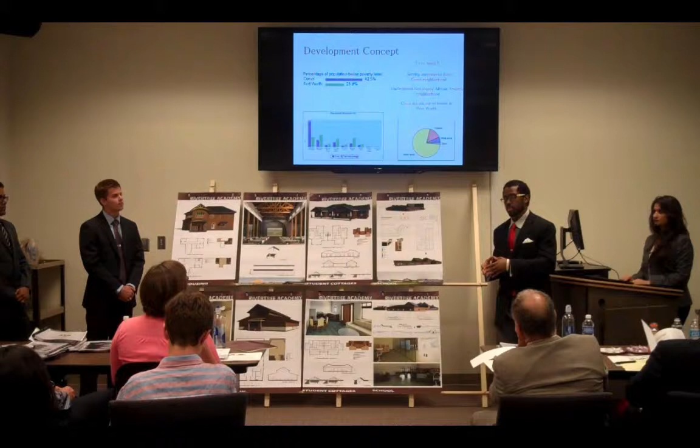As we've heard many times today, the Como neighborhood is an impoverished, underprivileged and underserved neighborhood. Many of the education rates are lower here, and a lot of students succumb to negative influences around them. We believe the Riverside Academy can be a safe haven for those students to get out of those negative externalities. Riverside will help them by refining their character through embracing God and embracing His natural creations.

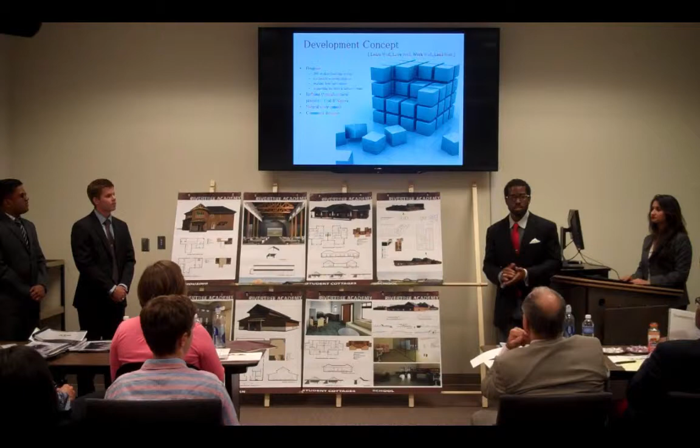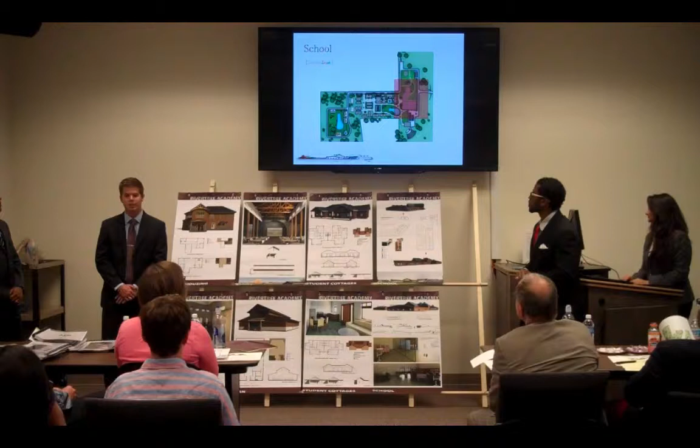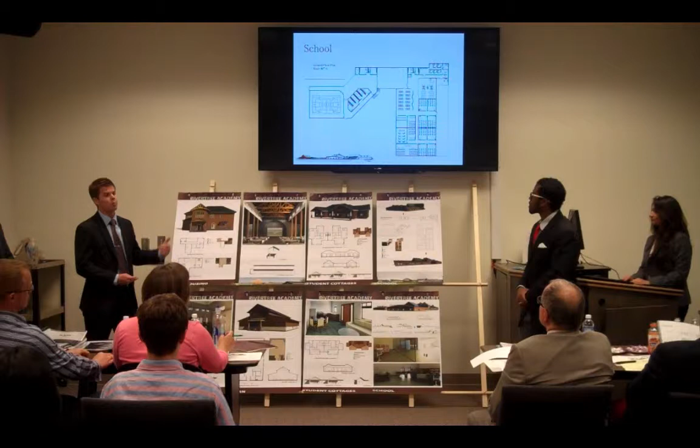Here is our overall site for this project. The next slide zooms in closer to the area we've decided to develop. What you see highlighted here is the school facility. It's two separate facilities. The one on the right includes classrooms, administration, counseling, library, and a cafeteria, built in Phase 1. The unit on the left is the recreational center, which would come in Phase 2, including a gymnasium and a couple locker rooms. This would be the unit the school would develop for future purposes.

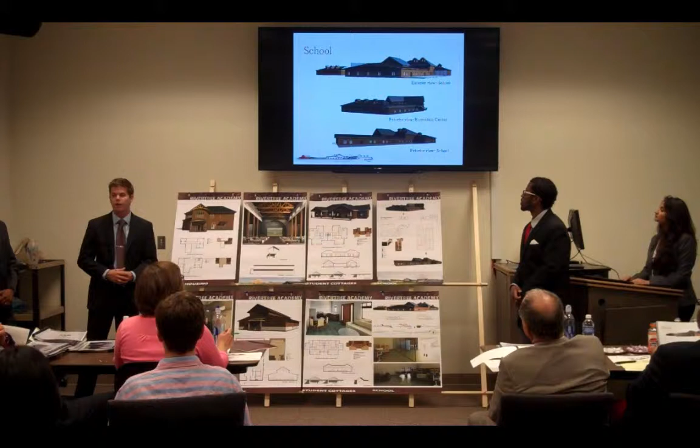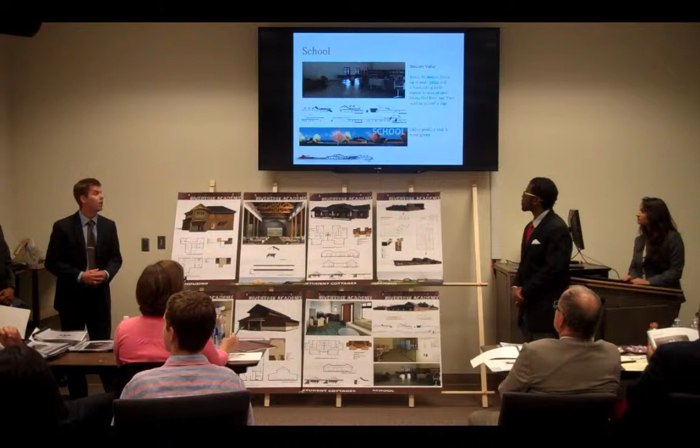The top image is upon completion of both units of the school. Below that is the recreational center with an outdoor deck, and below that is the exterior view of the classroom unit. At the top is a view from the interior library looking out upon the main hall and the cafeteria beyond. The top image is of the library, and the bottom image is what you see as you enter the site, the two units of the school.

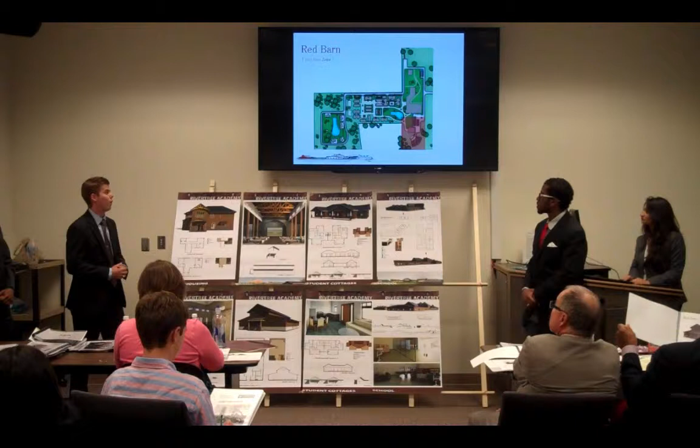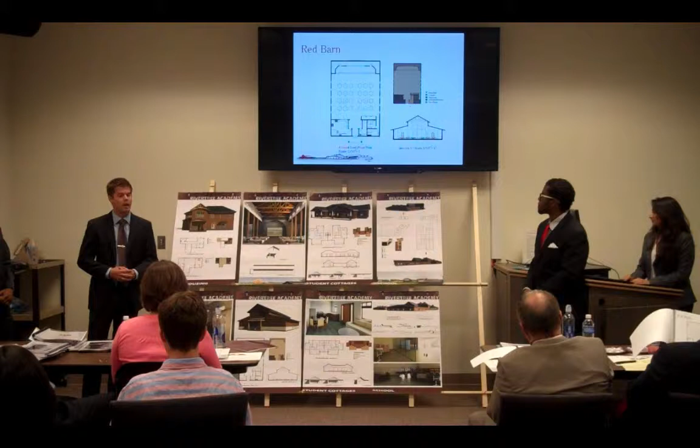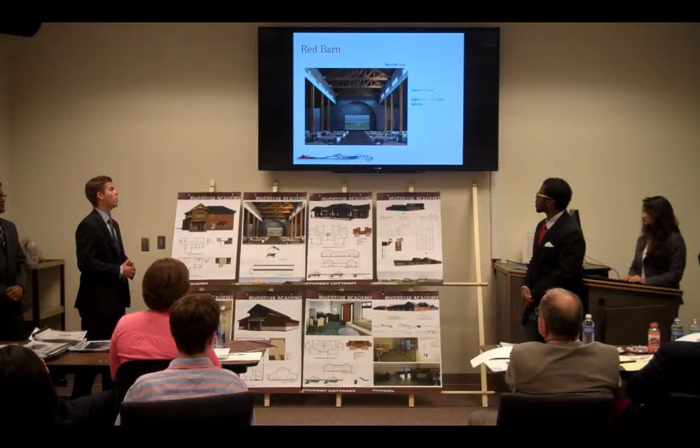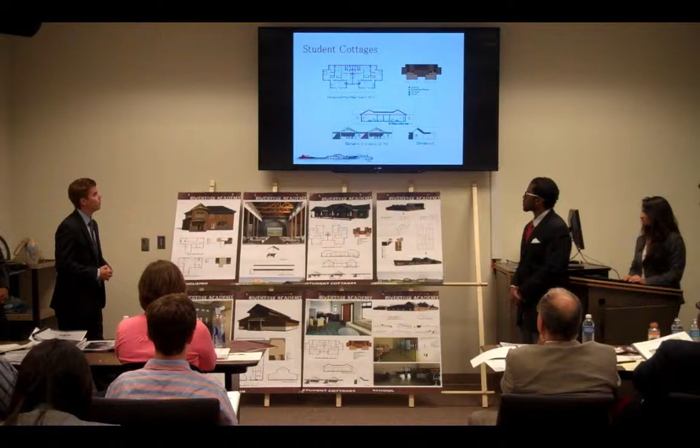This is the community we've created with our student cottage arrangement. This is an exterior view of a cottage and an interior view of a living room and kitchenette space. We've decided to go with two different student cottage types. One is a larger style incorporating 16 students and two supervising couples, a duplex style while still giving the feeling of a cottage. This is the smaller of the two units, intended for older students who need more privacy, including 8 students and 2 supervising couples.

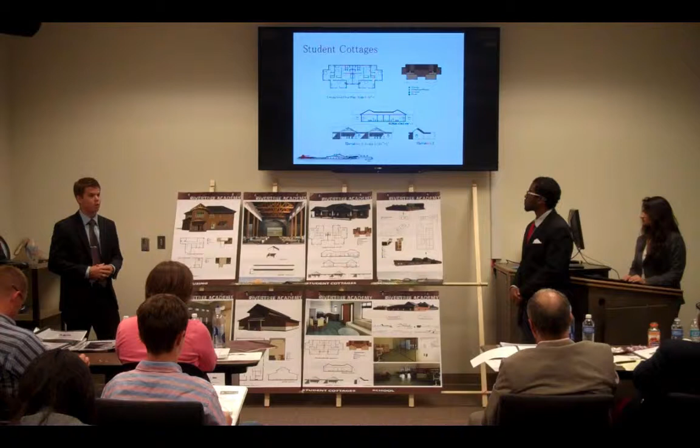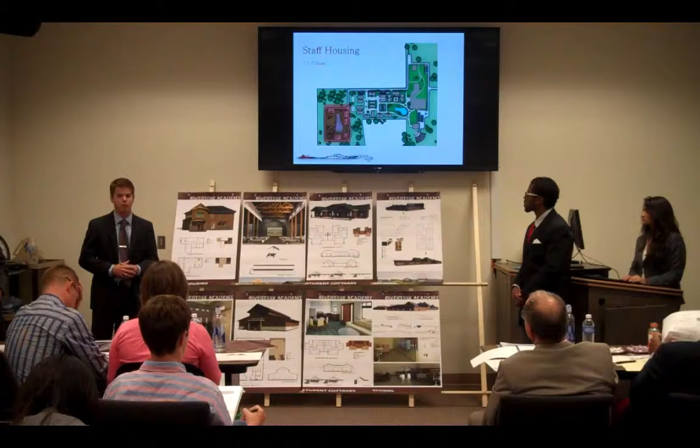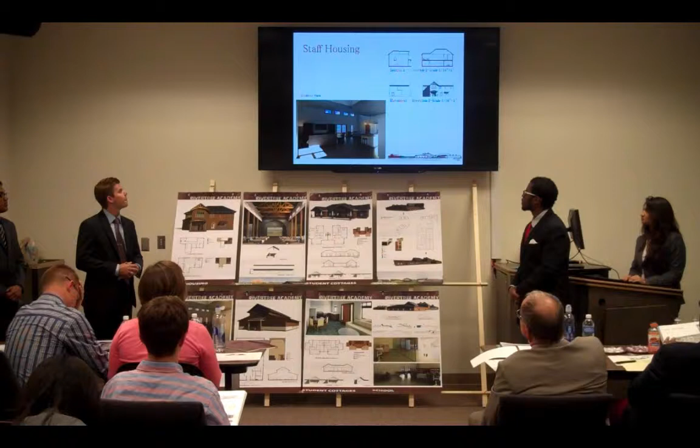Finally, moving on to our staff housing, we've decided to separate this a bit more from the rest of the community to give the families more privacy. This is an exterior view of a staff house, a 4-bedroom, 3-bathroom house intended for the use of the family, and this is an interior shot of the kitchen and living room.

Here is a diagram of visual and site access, both publicly and circulation-wise. The central circle is around the school, where we intend the most interaction between students and staff, kind of the central plaza space of the site. As you go beyond that to the student housing and staff housing, it gets more and more private.

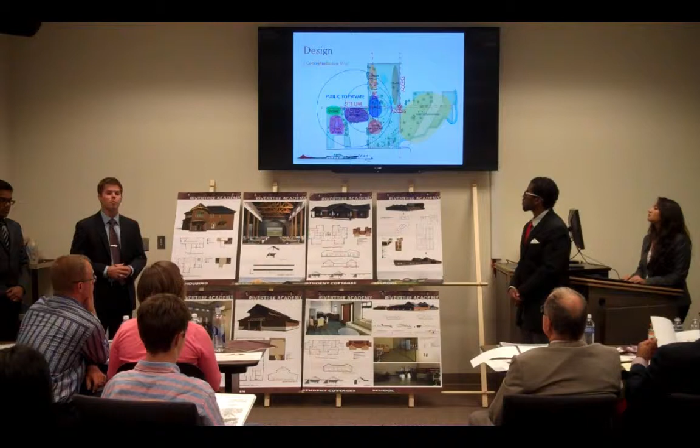Now that Jacob has told you a little bit about the sensory value our project adds to the site, I'm going to talk about some of the social cultural aspects. We focus mainly on the safety of the kids, so we've outlined the perimeter of the complex with the streets, and we've also made our phasing go outward so that we can minimize the amount of exposure those students have to health hazards.

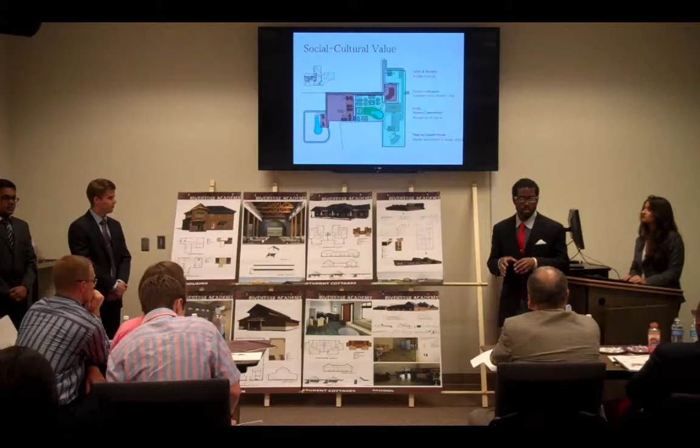Environmentally, we preserve most of the natural vegetation on site, as well as showcase the different natural features around the site. So we frame the ponds with residential homes.

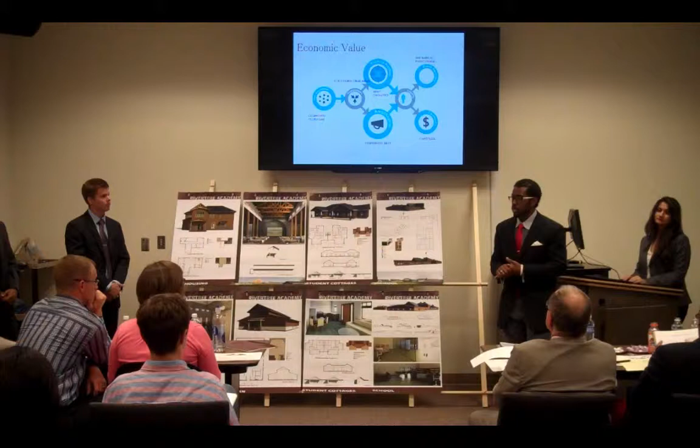Economic-wise, we've geared everything towards pushing the natural features of this site to actually get an economic return on that. So if we use the different venues on the complex, or hold different things such as performing art shows or trail rides, that can also bring revenue to the site.

Coming to the physical delivery, as we've mentioned that 5 of us would be forming an entity, we have adopted design build bridging as our project delivery type. Given the construction period of 10 years, we have phased our construction into 4 phases, of which 3 phases would be construction and the 4th phase would be closeout. Each phase is an average of 24 months.

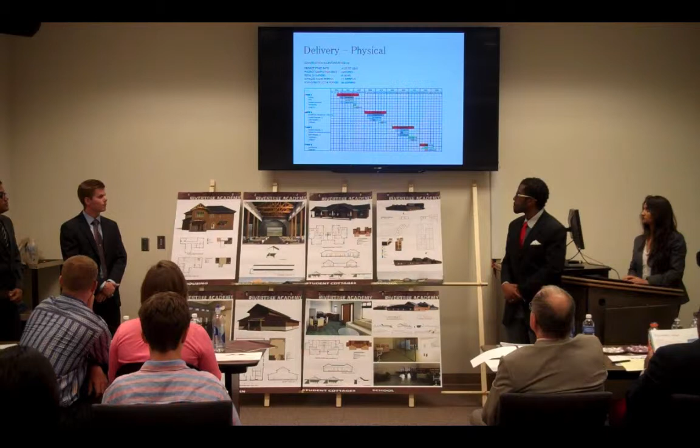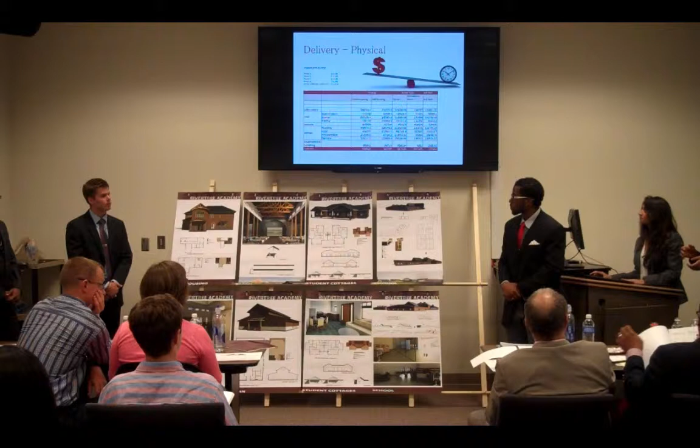The first phase of the project consists of the school block, red barn, and student housing. Existing roads will be retained during construction. Marked in red are the construction logistics with trailers and equipment. The first floor of the school block will be built during the first phase along with the second floor shell.

The existing plantation house will be used as a recreational center. The red barn is located slightly further from the school with its own public access. 7 units of student housing will be built during this phase, out of which 2 would be used as staff residence for the next phase.

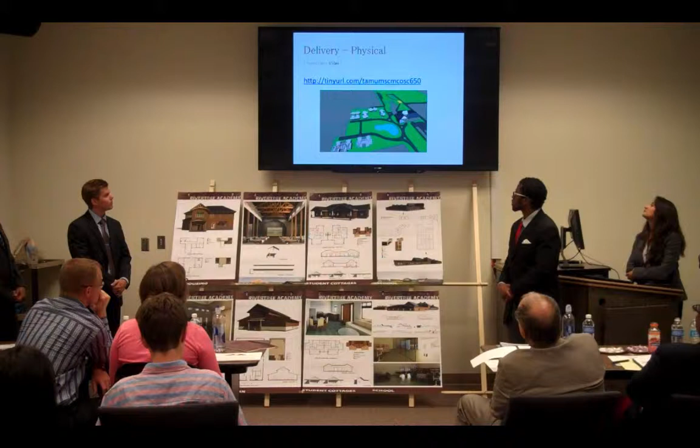One of the major challenges faced during the construction of this phase was to build a facility without any obstruction to the ongoing school activities. This was taken care of by using the periphery roads for access to the ongoing construction areas. The highlighted areas mark the site mobilization.

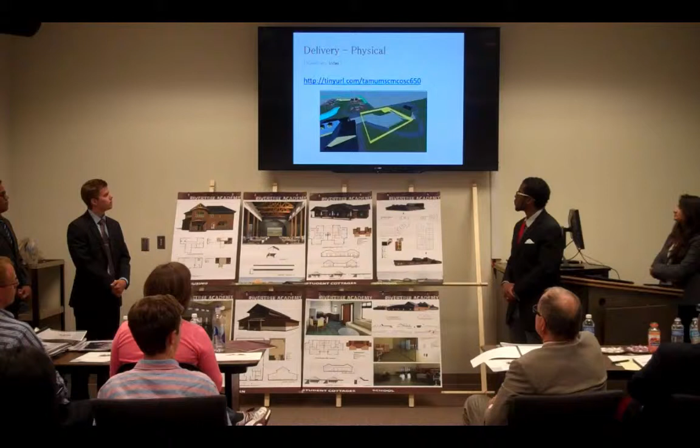The second phase mainly consists of construction of the recreational block and the interiors of the second floor of the classroom block of the school. 5 more units of student housing will be constructed during this phase. The construction areas are fenced on all sides for safety.

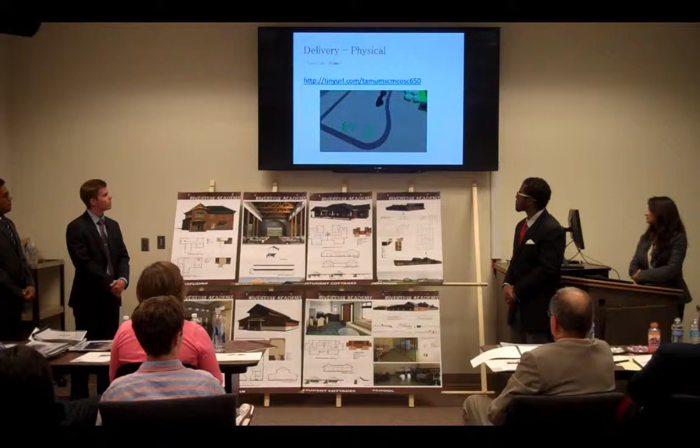This phase would include construction of the rest of the student and staff housing. Substantial amount of farm development would take place in the following phase, which will be followed by closeout. This is how phasing will be sequenced over a period of 10 years.

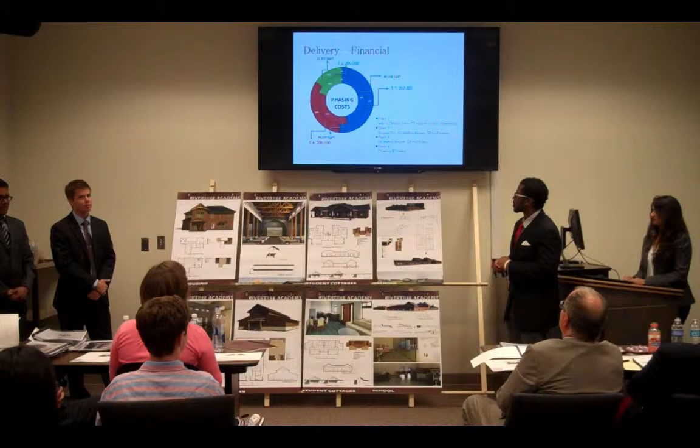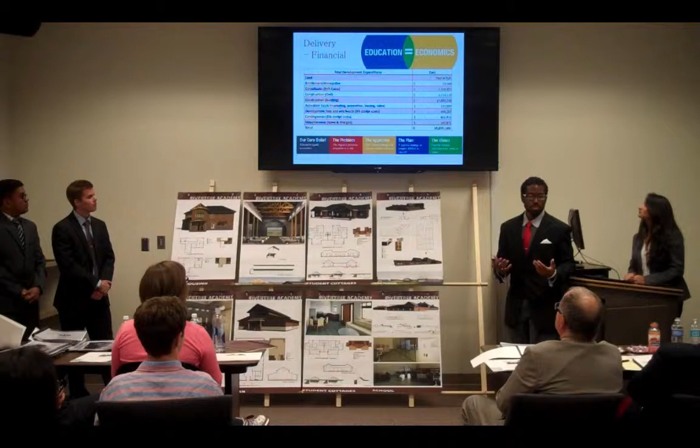Here we've also shown a little diagram of the actual phasing costs in relation to each other, so you can see the percentages that would be outstanding. The actual development budget is actually $18 million because, of course, that includes the infrastructure that needs to go onto the site as well as the building materials.

So to activate this site, we focus mainly on using summer camps to generate a great public to come into the actual site and see all of the things that it has to offer. With that summer camp, you can go on hikes and excursions of the creek, do water activities, things of that nature. And another thing in particular is the trail rides that we plan to have here.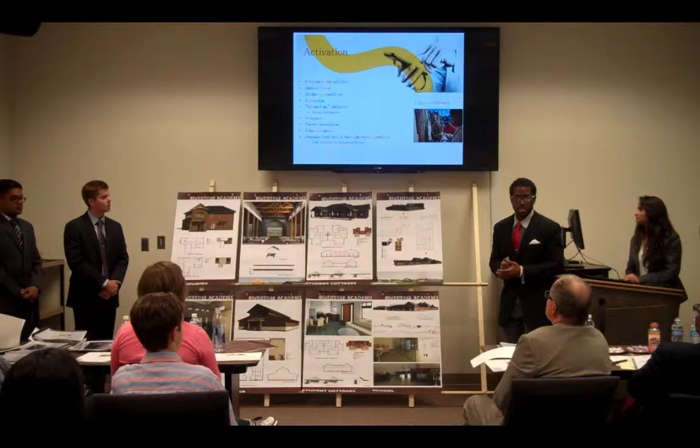That should be a big hit with the Como neighborhood because we learned on the expedition through Como that horses played a big role in the history of the neighborhood.

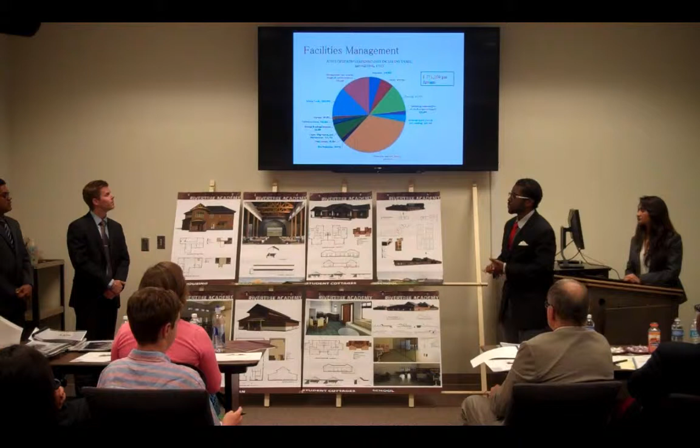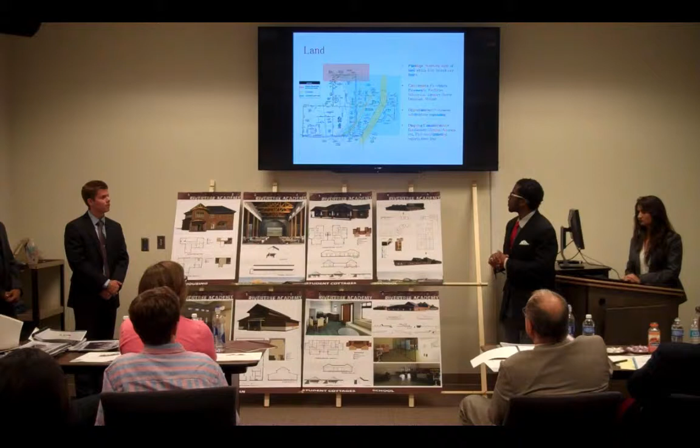Facility management wise, it'll be almost $800,000 to operate just the asset. We've taken into account all of the restrictions of easements and the floodplain within our design. The only thing that may be left to resolve is the annexation and zoning issues.

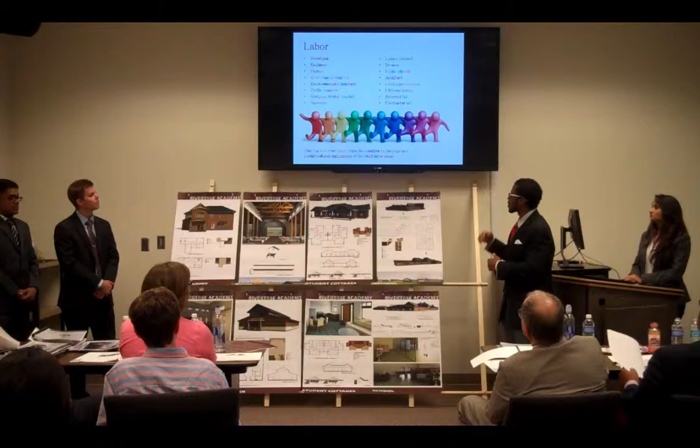Labor-wise, these are some of the people who you're going to have on your team to deliver this asset. And we want to focus on maintaining a sensitivity to the social-cultural implications of this child welfare issue. So we definitely want to incorporate that in our project.

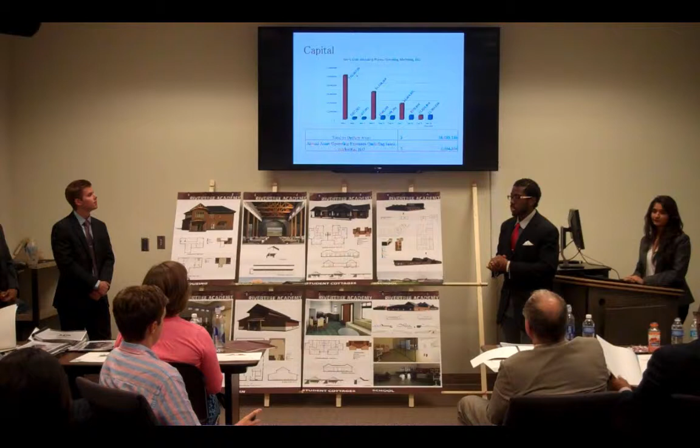These are some of the projections over the 10 years lifespan of the project, and the 10th year we plan it to be stabilized. These are just the numbers on the delivery and the operating expenses as well.

And lastly, in order to operate this entire campus, as well as the salaries and things of that nature, it would be about $8 million is what we've come up with, or what we've heard from the directors. And so it would be about $200 to $400 million endowment that would need to be in place to sustain that. And that sounds like a daunting number, but it can be done if we have the help of everyone.